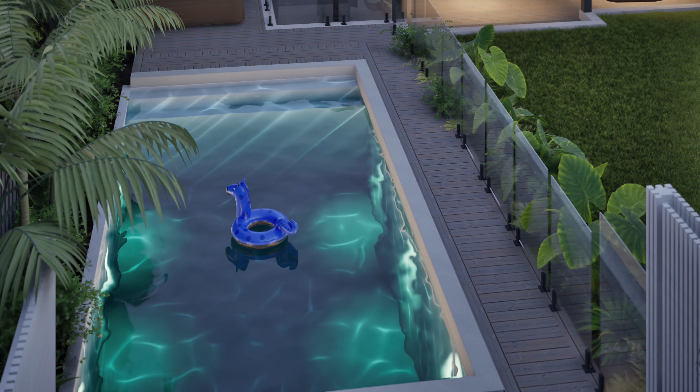A garden and a pool are for the outdoors what a kitchen and a bathroom are for the indoors. They're the wow factor, and they are what gives purpose to a home. They increase the value of the property, but they're also the main reason why family and friends want to come over.

They are also notoriously hard to get right, especially when there's multiple companies involved working in silos with frequent breakdowns of communication, and that can lead to disparate interpretations to what really should be a unified vision, a vision that is derived from a well thought out design concept.

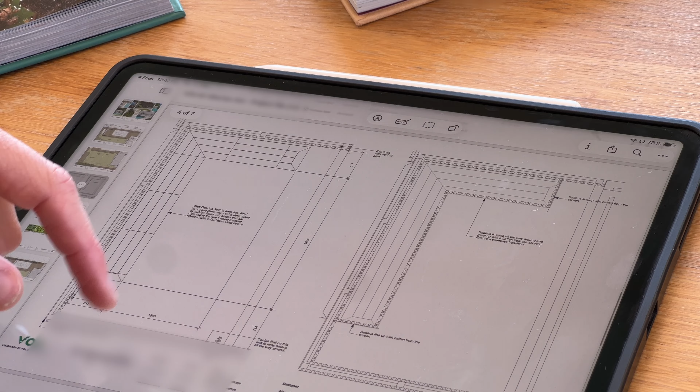But the reality is that a lot of the times landscape design concepts lack the required detail, measurements, heights, and quantities to accurately plan, price, and build a backyard transformation. This then leads to costly mistakes, an excess of man hours spent on solving the problem on the ground, and having to retroactively come up with solutions to problems that could have been avoided.

These mistakes and inefficiencies end up either costing the customer or the contractor, and landscape designers get a bad rap. My job is to resolve those issues before the first shovel hits the ground.

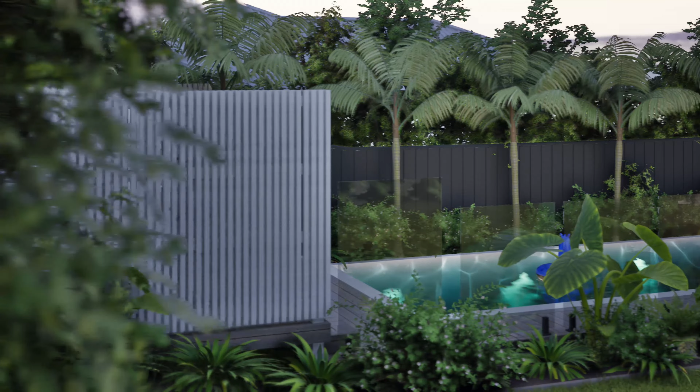Hello, I'm Alex Hildebrand, and in this video, I'll walk you through how I help a landscape company confidently plan, price, and deliver a complex pool project in Auckland, New Zealand for a young couple that needed to gain confidence with the contractor to build them their dream transformation. I'll show you how I produce accurate plans and visuals with all the necessary information to build trust with the client, help sell the project, and make it profitable.

At the start of 2026, I was approached by my client, a young family who had recently moved into their home, and while they loved everything about the newly renovated space, what it lacked was an outdoor space that would invite them to go play, entertain, and relax outside. This was such an important project to them because having two boys and with another daughter on the way, their inside spaces were going to get crammed fairly quickly, and it was important to them to keep the playful chaos outside.

Now, they had been approached by a number of fiberglass pool companies in the past, and while they'd promised them the world, unfortunately they couldn't deliver, and that was due to a number of factors. One, being access to the site was near impossible, and they also had to deal with a neighbor who was unwilling to lend them access to their driveway to bring material in and out. Trust was their number one decision-making factor. Since they had been let down in the past, they needed a strategic partner to back them up and provide feasible solutions.

They wanted a pool big enough to swim and play in with a lounge area, and for the flow to feel right, meaning that they wanted their journey to the pool to be short and direct, since that's the route that enthusiastic kids would probably take. And they didn't want to sacrifice too much of their existing lawn. And lastly, they wanted for their space to be maintained easily and to be kept tidy. Visual appeal was important to them, and they didn't want to compromise on the quality of how the place looked.

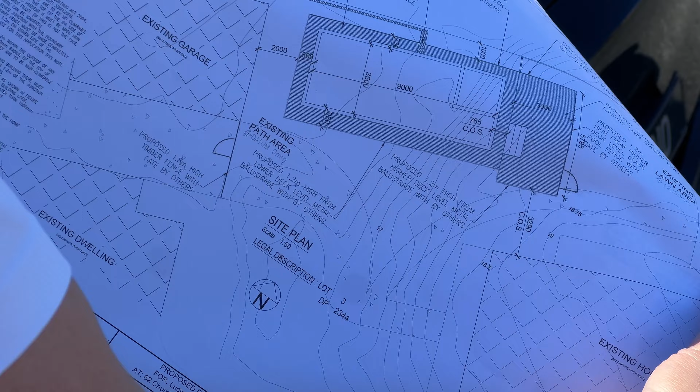So, with these objectives set, I start the design process. After a thorough site measure, obtaining the property files and consulting with a geotech engineer and getting their site survey data, I import that into Vectorworks to create an accurate representation of the site model, the location of the existing structures, like the retaining walls, and the house. This step is crucial as it allows me to get a better feel for the site, its slope, the sun exposure, and the environmental factors that would influence the design.

A comprehensive design isn't a pretty picture, it's an informed decision. So here's what I learned from the initial research phase. The geologic makeup of the soil had volcanic rock at varying depths. All except for the eastern side of the backyard, where rock was found at around 1.4 meters at the lower lying end of the slope and even deeper towards the higher end of the slope.

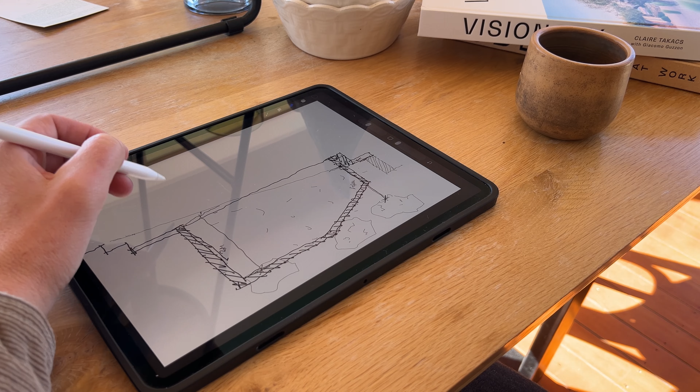This meant that part of the pool would have to be slightly above ground, and the remaining side would need to be cut back to an extent to blend in with the proposed deck. Exploring some iterations, the client and I land on a final layout that would work with the site. It would create a direct and natural flow into the pool area and complies with the relevant building regulations.

A series of floating deck platforms seamlessly integrate with the existing retaining wall and gradually make their way up toward the rear of the property. The middle platform houses the pool, which, because of the access being so tight, needed to be a custom concrete pool rather than a fiberglass pool, which we couldn't crane in.

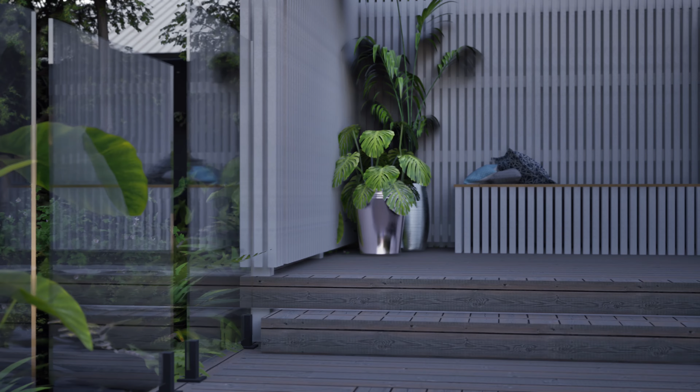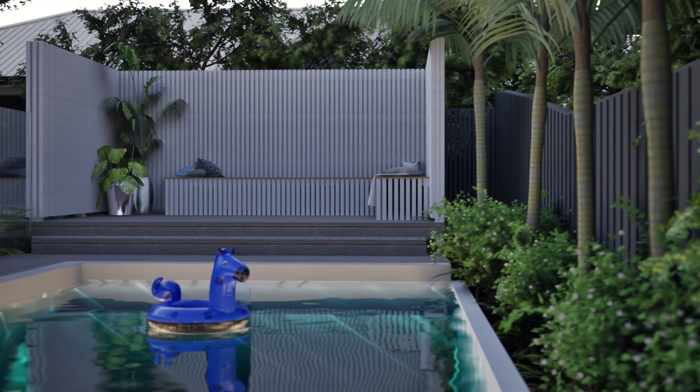Making your way past the pool, up 2 steps, you reach the veranda and lounge area. A modern batten look with integrated seating and storage looks out towards the house, visually connected by the pool. And lastly, we frame and soften the structures with a low native planting palette to break them up and give each space its own purpose.

Along the sides and the rear of the boundary, I suggest to plant a multi-layered canopy of Nikau palms, coprosma shrubs, manuka trees and ground cover to grow a diverse root structure, to penetrate the ground and to provide a habitat for pollinators. This would aid to turn their garden into part of a wider wildlife corridor in Auckland and to improve the permeability of the soil.

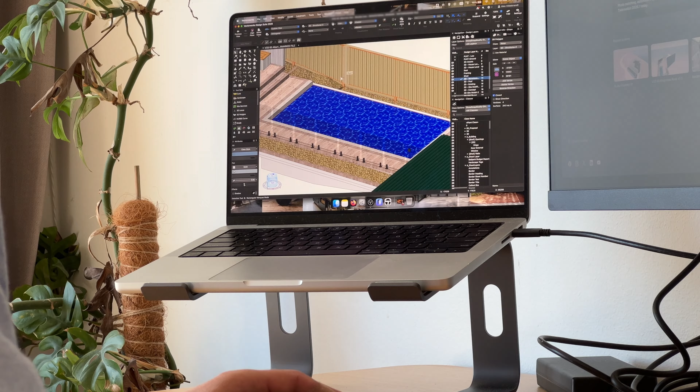A thorough design process protects the client's investment, the contractor's profitability. And that was precisely one of the biggest concerns for the client and for the building company. Throughout the process, I work efficiently and clearly in 3D, utilizing the capabilities of Vectorworks to its fullest potential and ensuring that whatever I propose would align with their budget as a paramount.

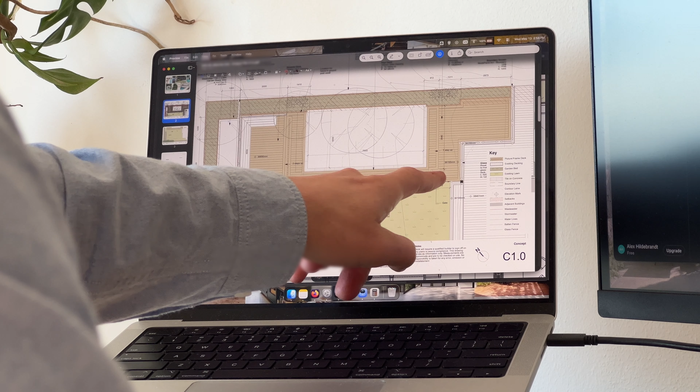I allocate ballpark figures to objects and run reports on total cost estimates as I go along. This allows me to think on my feet and adjust either quantities or finishes so that the final proposal matches the client's expectations and gives the builder the confidence to price the project without having to compromise on time and quality. Measure twice, document once. Efficiency isn't just about speed, it's about the reduction of waste.

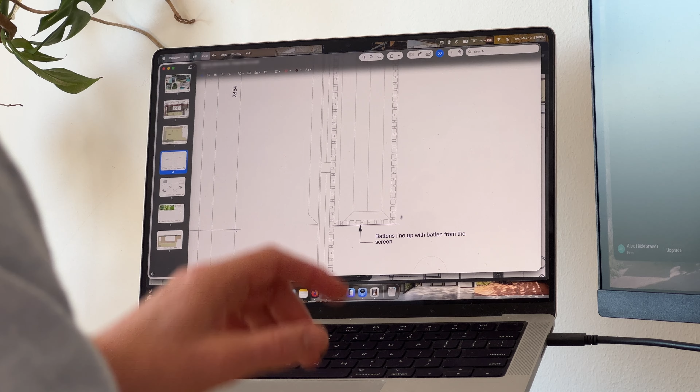Bespoke solutions like the veranda are detailed enough to not have to figure out the construction process on site, saving labor hours. Take the seating detail. The drawings specify the batten alignment so that the builder doesn't have to eyeball the lines. And because I provide exact quantity reports for concrete, timber, and cut and fill, the contractor can quote with accuracy. This is how my design plans move from being an expense on a project to an insurance policy for the client and a profit center for the builder.

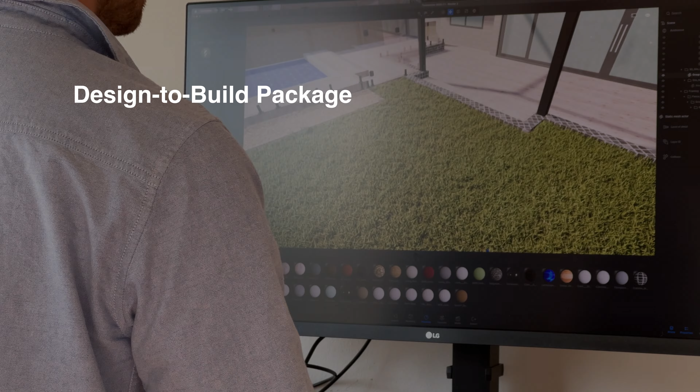With a matched budget and a happy client, I then provide the builder with my design to build package, which includes a site establishment plan highlighting access, items to be demolished and vegetation to be removed, a mood board or lookbook to illustrate materials, colors, finishes, and planting themes, the concept plan, which is annotated with any information that the builder might need to know prior for quoting.

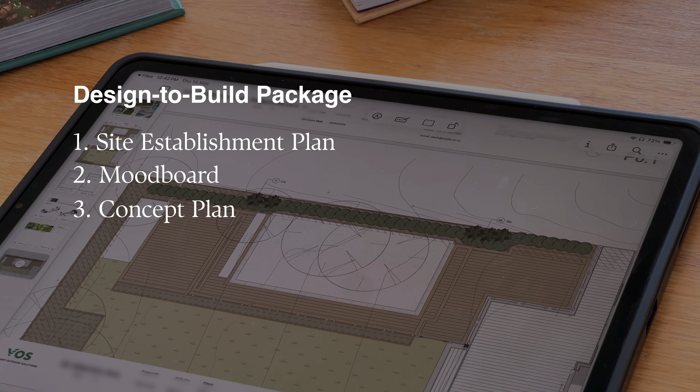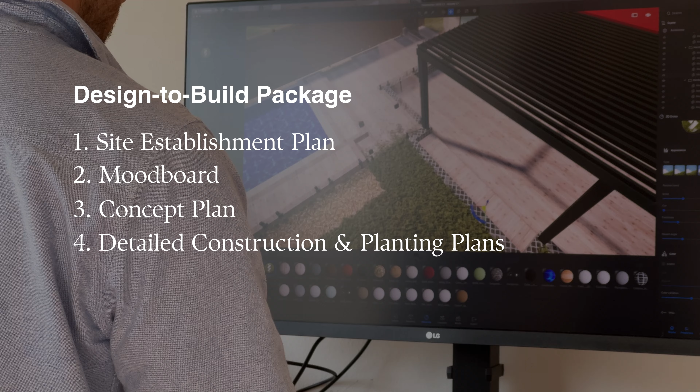This plan also includes measurements and levels, both finished levels, reduced levels, and cut and fill volumes from the excavation. Detailed construction drawings, the planting plan with layouts, quantities, grades, and alternatives. And finally, because I've modeled everything already, I provide 3D renders to help sell the project.

The result is a space that feels inevitable. It looks like it was always meant to be there because it was the logic of the design, dictated by the site conditions. It works with the site, not against it. It also goes to show that great design and proper planning go hand in hand. It builds trust between the contractor and the client, and it sets the project up for success.